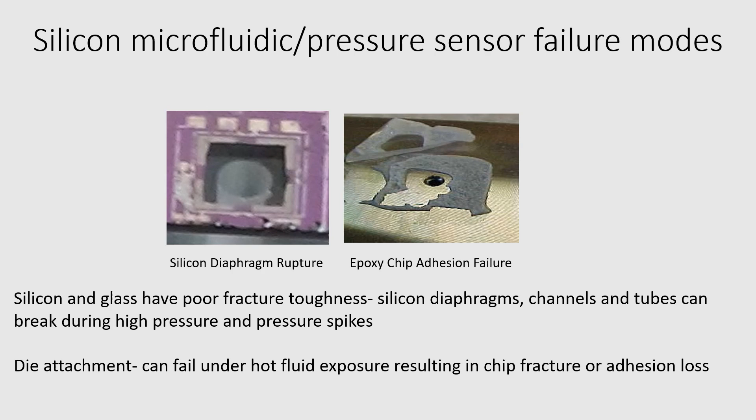Tubes can just rupture during a pressure spike, for example.

Some solutions to this include the use of silicone oil immersion with a corrugated metal diaphragm in the case of pressure sensors. You might use pressure snubbers in line to knock down the pressure wave. You can apply strain gauges to tanks and diaphragm walls opposite the corrosive fluid side of the structure. So these are some of the conventional methods that have been used to enable us to still use silicon, piezoresistive, and other technologies with harsh environments.

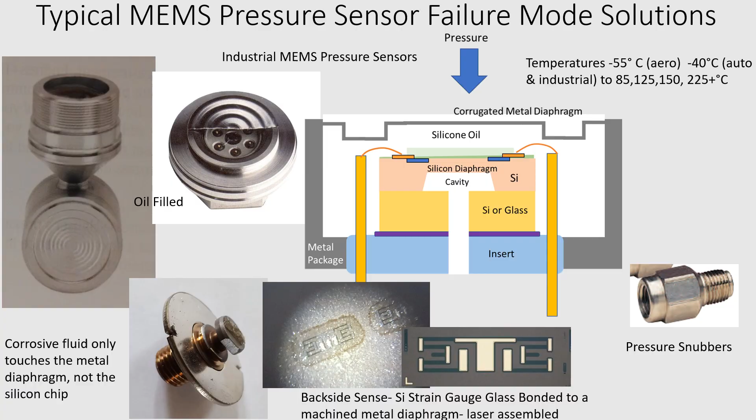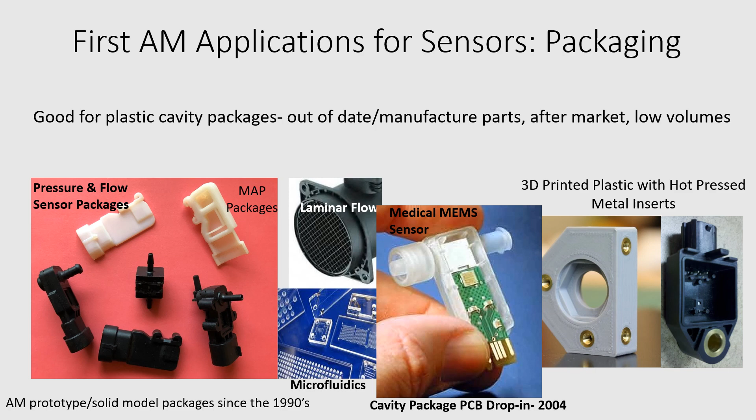Packaging was one of the first applications for additive manufacturing. I think in the 1990s, I was making models of sensor packages using additive manufacturing. We used them for cavity packages. An example of a medical Luer set plastic package is shown here. It's been used in microfluidics for microfluidic channels. And with metal inserts, you can actually use 3D printing to make prototypes for industrial or automotive devices with a good, robust mounting bracket capability.

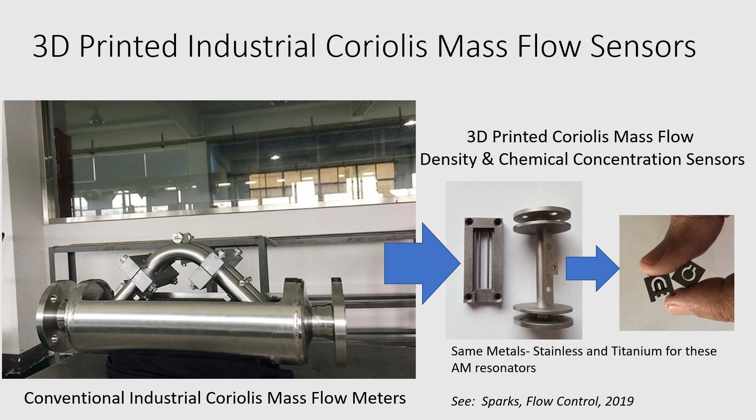And then furthermore, I've built on that to even be able to print extremely small resonating tubes for this application, which I'll talk more about at the end of the speech with regard to printing MEMS wafers.

3D printed orthopedics is another application, and I consider this a pretty corrosive environment. Bodily fluids are like a brine or saline solution. They can be printed from biocompatible materials like titanium. You can have a rough surface in the print, which is a pretty normal texture when you're using powder printing. And this can promote cell growth, and it can be customized. You can build upon this with some of the techniques we've already developed for implantable MEMS devices.

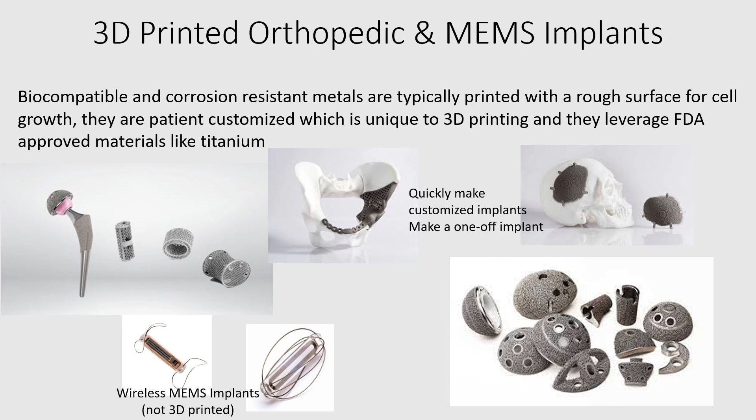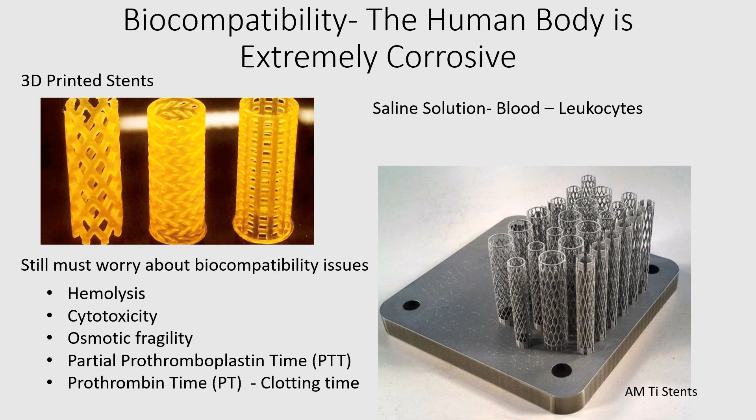Here's some examples of both polymeric and titanium stents that have been 3D printed. Like I said, these can be exposed to saline solutions, to blood leukocytes. To see what the interaction is, you're going to have to do a whole battery of biocompatibility studies, medical device implant studies for a Class 3 FDA approval process. But however, this work's been going on, and it will continue to move forward.

Now, let's talk a little bit about what's the smallest feature size that can be printed in 2022. You've got a variety of electroplating techniques, borrowing on LIGA. You've got some photopolymeric techniques for polymers. You're getting down into the sub 10 and even 1 micron feature size with these methods. So there is promise here to make some extremely small printed structures.

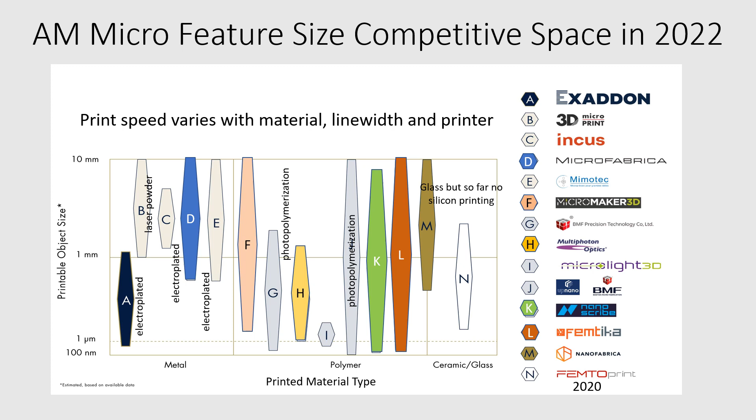As I mentioned, this has been done in the past with LIGA, using a photoresist mold and electroplating a variety of platable metals. I was most involved with nickel and nickel alloys for a resonator project that was developed on top of a CMOS wafer—essentially 3D printing on top of a CMOS wafer.

But there were some things we learned. It took about 7 or 8 years to get to the point where we could make an automotive-robust device that would pass PPAP and all the reliability testing. There were problems with drop test and shock because the initial plated material was soft. We had work hardening and cyclic fatigue issues, so we had to use alloying to increase hardness and robustness. The material was also ferromagnetic, so we had to shield it with mu metal.

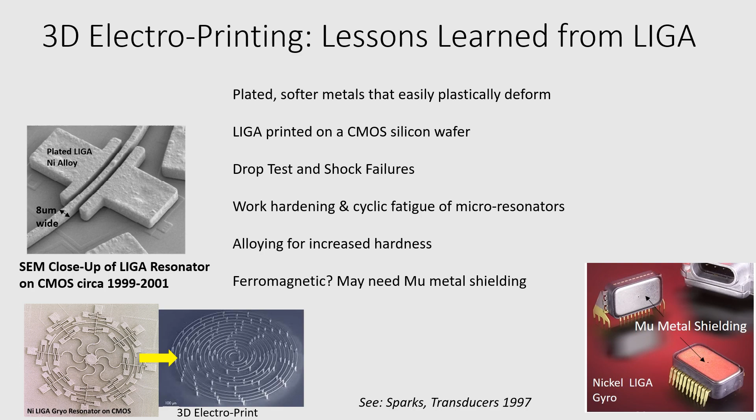So there's a number of things we can learn from our lessons in LIGA and apply to 3D printing now.

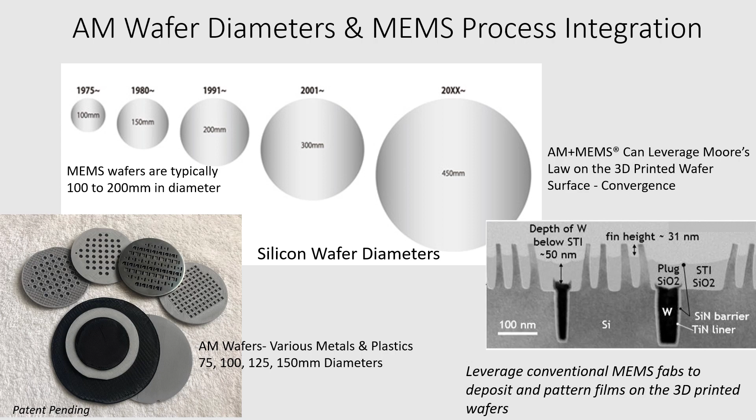So what I've proposed is to merge the two together. On the left are some of the 3D printed MEMS wafers I've done with polymers and metals—3-inch, 4-inch, 5 and 6-inch diameter wafers. By being able to print a planar wafer, we can leverage existing lithography techniques that have been developed over the decades for semiconductors.

And 3D printing has some really amazing capabilities when it comes to what you can print in one session. You can print an array of tubes, cantilevers, diaphragms, cavities, all at one print. That would take hundreds of steps to accomplish with conventional deep reactive ion etching, lithography, and wafer bonding techniques with silicon or glass.

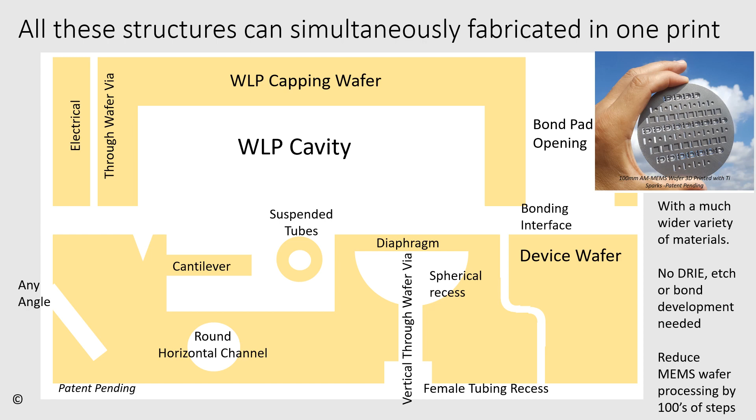So by 3D printing the substrate, getting all of your mechanical structures formed in a print, you're saving hundreds of steps, lots of time, lots of development, and then you can do your film processing on top of that planar substrate.

After dicing of the substrate, if you plan your design correctly with regard to packaging, you can have robust package features made into each chip. On the left here, I show some of these tube structures with male tube ports coming out of the chips, out of the side. You can have male and female tube structures in the bottom of a chip.

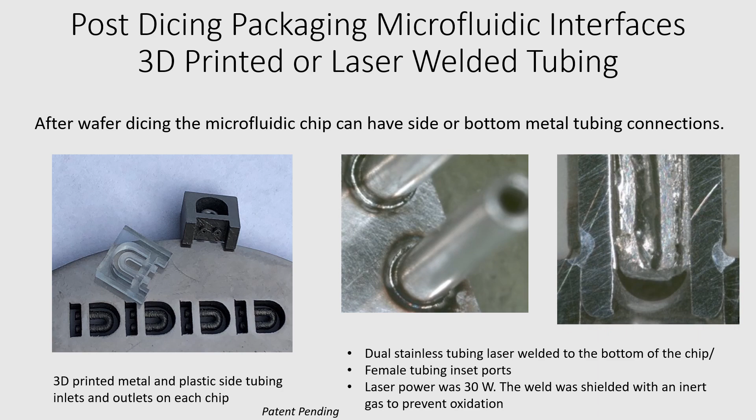On the right here, this was a female recess in which we inserted stainless steel tubes that can be laser welded in place. You can make a very robust sub-package using this 3D printing technique. It's going to be burst resistant—there's no epoxies, no glass, nothing that has poor fracture toughness in the entire chip-through-package fluid pathway.

Then, just to show you how you can put patterned films on top of the surfaces of these metal wafers: you can use CVD deposition techniques for dielectrics, for piezoresistors, for metals, for piezoelectrics, and pattern them with conventional spray-on or spin-on methods if you're clever in the way you design your wafer techniques.

These can be pressure sensor diaphragms, as shown on the left. You can put strain gauges on orthopedics, as shown on the bottom left. And then you can assemble a very conventional pressure sensor or other type of fluidic device.

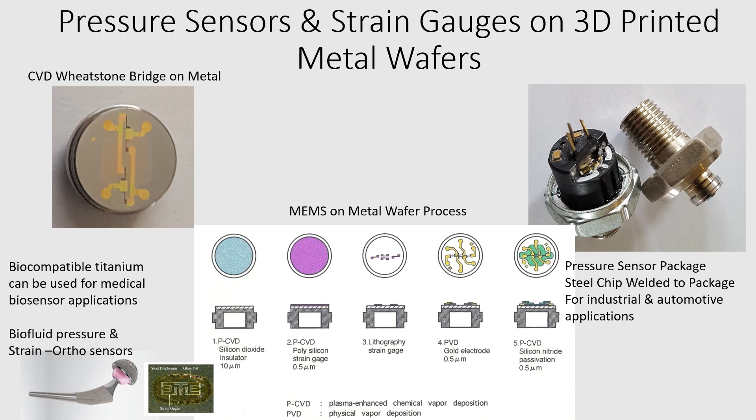So in conclusion, I'm proposing to this group that 3D printing, additive manufacturing of a variety of materials—stainless steel, superalloys, titanium—can be used to reduce the process complexity of a MEMS device or sensor.

If you 3D print the structure with all these complex surfaces and three-dimensional features, you can then put that into a MEMS fab that allows you to process metals. You can get all the lithography advantages of conventional semiconductor processing, and you can add that to the material diversity that can be 3D printed.

And then you can come up with a new product—an additive micro-manufactured wafer, chip, and device—that can be customized and is ideal for harsh environments.